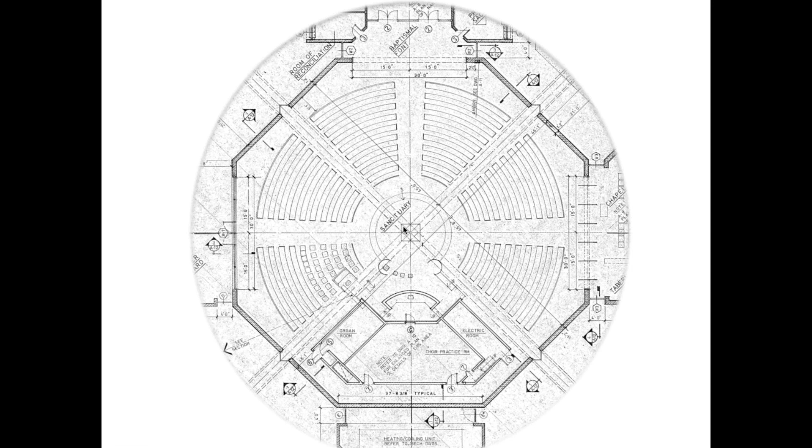In modern codes, the pews have to be farther apart, and we were also looking to increase capacity a little bit. But from this comparison you can see the new plan is pretty much like the original—seating the majority of people 270 degrees around the altar, with the altar still in the center.

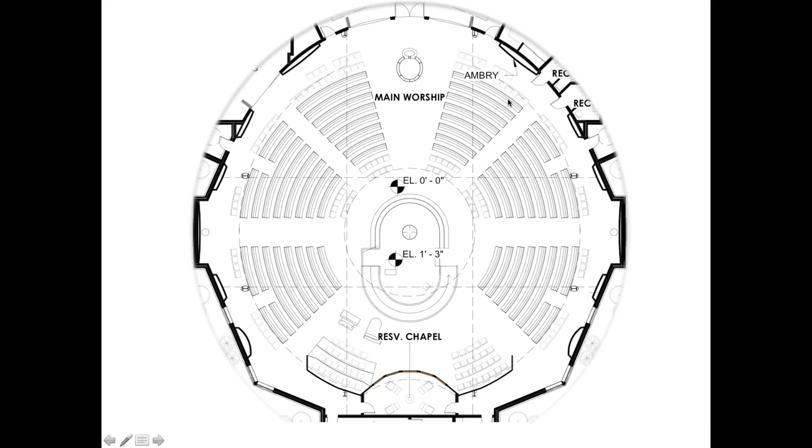Let's take a look at this. By the way, the distance now from the altar to the farthest seat is 50 feet, so it's not much more, considering we increased capacity by 23%.

Let's take a closer look at a cutaway view of the proposed worship space. A cutaway view is what you'd see if you sliced the church about 5 or 6 feet above the ground and looked down into it. The main entry is off to the lower left—that's where you'd come into the worship space. We'll look at the whole building in a minute.

The first thing you notice is that if you take the cross axes of the building, that's where the altar is located—in the exact center of the space, under a spire, for a very important theological reason. We felt it was very important to continue that in this new building.

The documents suggest that the font be aligned with the altar and be near the entrance. This is something you had in the previous church, but some complaints we got were that the font wasn't accessible, wasn't visible, and there wasn't enough space around it. So rather than having the font out in the gathering space or narthex, we've moved it well into the worship space, among the assembly, so that when baptism is celebrated, it's celebrated within the community and all can see it.

One way we allowed for that is by providing a very wide aisle around the font, giving lots of space for children and others to gather around it. It also provides nice wide aisles so that if you're bringing in a funeral with a casket and pallbearers, they can go by, or if a bride is coming down the aisle, there's plenty of room without stepping around the font. In fact, the other aisles are also pretty wide to allow for more gracious movement in the space.

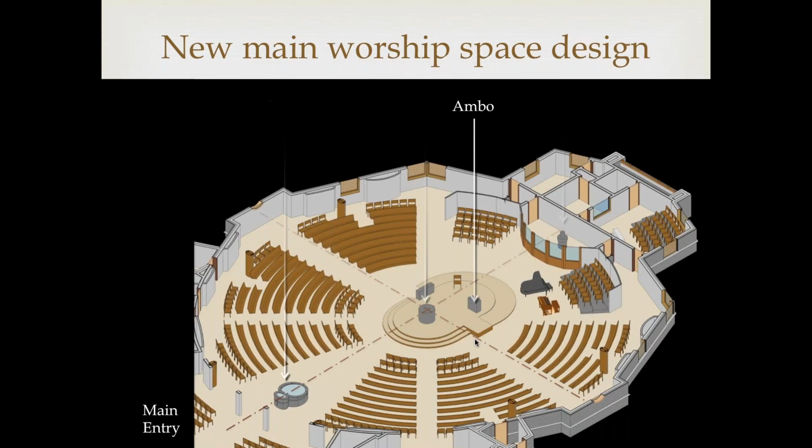This one is handicapped accessible by means of a curved walkway around the back. It's a very shallow slope, so it doesn't even qualify as a ramp, which is why there won't be handrails, but there will be curbs to keep people from falling off the edges of the platform or walkway. The ambo is set a little farther back from the center line on that platform so it can better engage with the people on the sides.

The music ministry is right behind that area, off to one side. So they are part of the assembly, which is really important, that the music ministry be in a location where they're both part of the assembly and where they can lead it. This is the perfect place for them.

This is all flexible seating on movable risers, so the music ministry can reconfigure it however it wants. There's also flexible seating on this side so that if you have more choir members, you can add here, or if you have special choirs for different times, there are all sorts of possibilities, because everything behind the altar platform is movable.

Speaking of seating, there are actually 3 types in the worship space. Most of it is fixed seating, pews, as before, but there's also some flexible seating in the music ministry areas on either side of the reservation chapel, and a couple of rows in front of the pews here. That's flexible seating, and we're talking church chairs, not folding chairs, very nice chairs that match the pews.

We provide that so that if, from a liturgical point of view, we needed more space in front of the altar platform for one thing or another, those chairs can be removed to give us more space. For instance, at a funeral you might want more space around the casket, so you might take out some chairs and leave others—all very flexible.

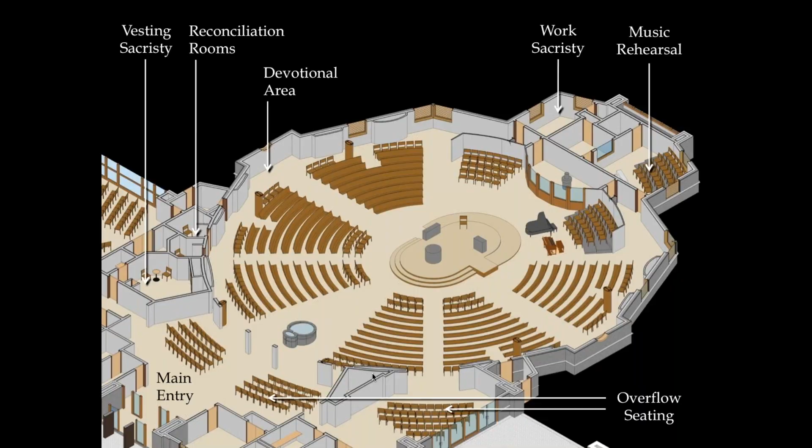Pulling back a little bit farther, you can see this gathering space. As you come into the church under the bell tower, which we'll talk about in a little bit, there's this big wide open space that has lots of room for lots of things. There's places to sit and rest, places to chat, places to set up tables for selling things. It's a very big, open, flexible space with a lot of natural light coming into it.

Between it and the worship space would normally be glass partitions or doors of some type. But when we need to use this space as overflow, those partitions would be able to be moved out of the way to really tie these two rooms together, so that the people sitting in this space would really feel part of the assembly. The other room over here on the right is the dining room, which has a similar capability.

This would be a solid wall that would also be opened up to allow people in this space to be able to be part of the worship. So with all the overflow seating, people are pretty much able to be part of the worship.

Those rooms also serve other functions, obviously. The dining room, our thought was, if you were going to do a repast after a funeral, this would be a great room because it's completely isolated. You wouldn't be disturbing anybody coming into the funeral if you're setting up ahead of time, and people could easily use this space for that. There's a kitchenette off of it.

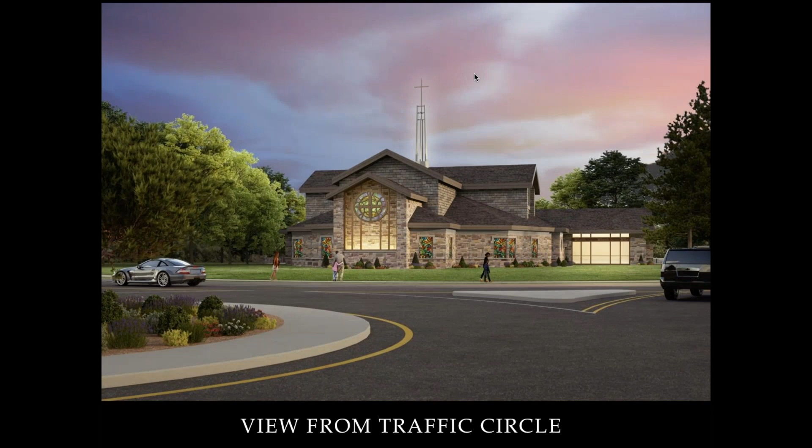A few things to note: we're about to walk you through three different photorealistic renderings. As you can see, it's really exciting to see what the look and feel and the architecture of the building is going to look like.

As Jim mentioned earlier, the materials and final colors have not been finalized. We are recommending a variety of stone, slate, roofing materials, and other colors. They're definitely, in our opinion, appropriate and very close to what I think is the right solution. However, in the next phase of design, we'll be getting into a greater level of detail and specificity on those material items.

So here we are - the first view, a very prominent view, standing at the intersection of High Mountain Road and Franklin Lake Road at the roundabout. I think this is a very popular view that most folks in the community would see on a daily basis. You can see a few very prominent features of the new building, starting at the top, a prominent steeple with a cross topping off the building, signifying that this is a place of worship.

You'll see how present this building is as it's located on the site. If you recall, the previous building was tucked behind many trees. It was very low-lying behind a few different landscaping berms. It was very difficult to see into the building, to see light, to see activity, and at times to even acknowledge if it's a church or not.

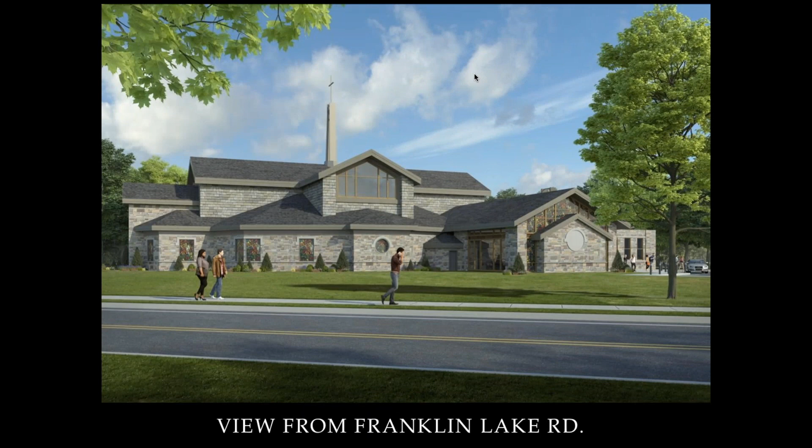This next view is taken along Franklin Lake Road. You'll notice how the building extends much longer in this direction, and it really gives you a great understanding of the architecture, the form, and the presence of this new structure. Again, that steeple adorning the top of the building is very prominent and highly visible.

Directly below the steeple, you'll see a very generous window. We call that a clerestory window, which will welcome an adequate amount of natural light into the worship space. We actually have three windows just like this on the east, west, and north to allow natural light to flood the worship space on a daily basis.

As you move down the building, you'll see along the base of the building the natural stone material, the stained glass windows. You'll notice some circular windows, decorative windows in areas of reflection. On the right side is where the daily chapel will occur.

You'll notice how that's reaching out and actually steps out of the footprint of the main building. This is one of those moments where we wanted the architecture to convey a sense of welcoming, a sense of outreach to the community. You'll notice some transparent glass and also stained glass in that daily chapel as well.

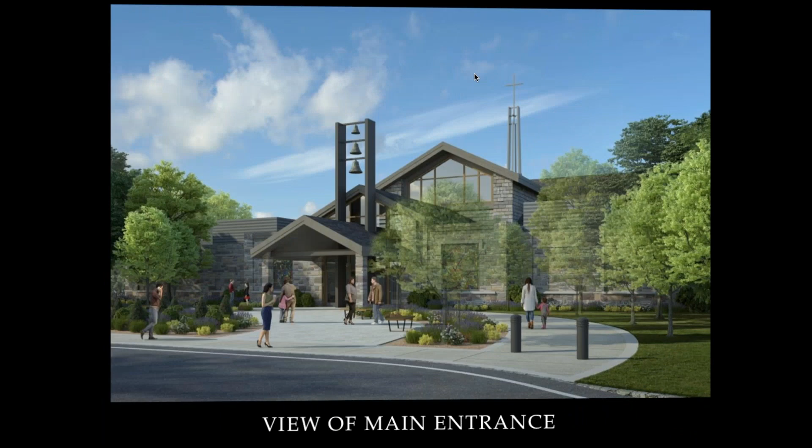And here's a very exciting view. As we look now from the parking lot, looking at the main entrance of the building, this is the view that every parishioner would experience as they approach the new building. There's a few very prominent features: the steeple high up in the background, and as you see the roof line step down to a more intimate pedestrian scale, you'll notice the new bell tower.

This was one of those hot topics that we explored many different options. We looked at preserving the original tower, we looked at reinventing a brand new tower, and we believe we landed on the perfect balance of preserving the old, salvaging the old bells, reintroducing them in a similar configuration, small, medium, and large, suspended in the same way that they previously were, in a new bell tower structure.

What's really exciting about this is not only the visual and audible connection every parishioner would have as they approach the building, but you also get to engage and walk under that bell tower at the front doors. So we feel like this was a very appropriate, respectful treatment of the past and marrying it to the future, a creative way of making this bell tower structure part of your experience on a daily basis.

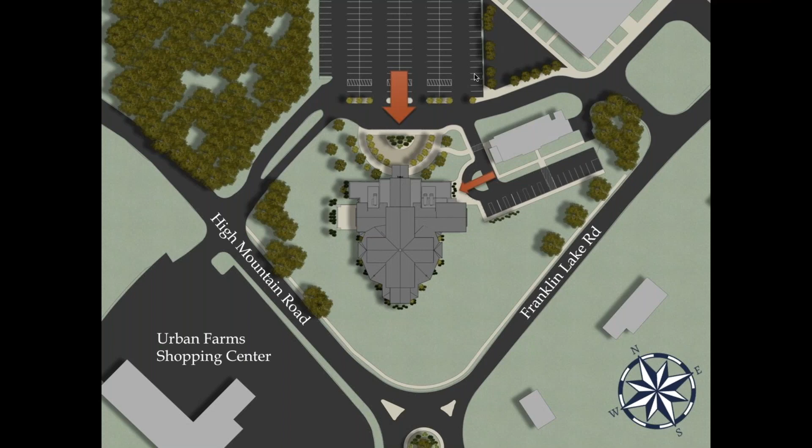So the site design was a hand-in-hand effort all along during the design process. As we developed the floor plans, we also looked at how the building wants to engage the site. We looked at the proximity to the roundabout, the proximity to the parish center, and we explored the drop-off points and how many entrances are appropriate from a security standpoint and also a convenience standpoint for Father John and other parishioners to have direct access from the parish center to the new building.

You'll see two red arrows, the larger red arrow on the northern side or top of the screen. That's your main entry point, where that last rendering perspective was developed. You'll see direct access from the parking lot through the plaza, up the curved path to the front door and under that bell tower.

On the right side, you'll see that smaller red arrow. That is what we're calling a secondary entrance or a drop-off point for the elderly or handicapped. That's also a good access point for folks coming to a daily chapel service.

We're also proposing new parking in front of the parish center. You'll see a number of handicap spaces and also other spaces located so that the front door of the parish center can formally now be used as the entrance.

If you go to the next slide, we also wanted to point out and share and graphically depict the footprint of the old building. This was the original church footprint. You can see the location to the parking lot and proximity to the parish center.

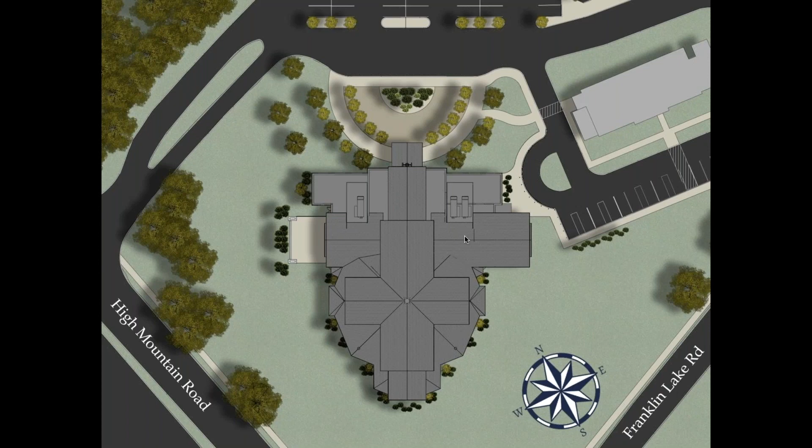Thanks, Matt. So now you've just seen our beautiful new design, and I guess you're asking a couple of questions. First might be, how much will it all cost and how are we going to fund this?

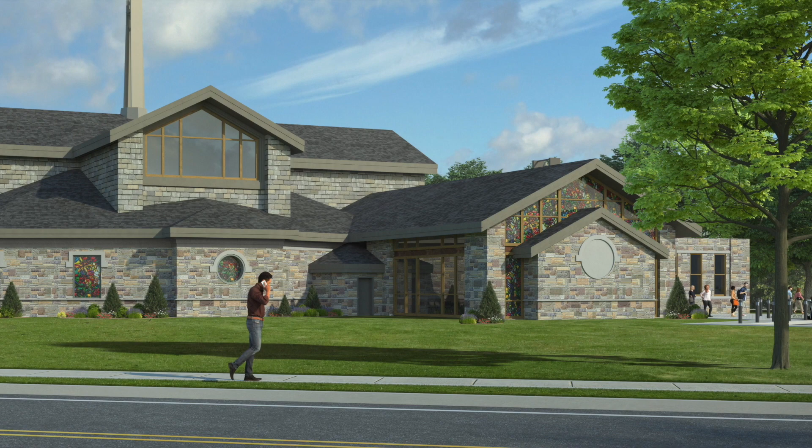First question: for the chapel windows, can we have stained glass windows instead of regular windows? As of right now, we have stained glass at the front of the room for the daily chapel. On the side window, we did envision some degree of transparency. We have not done the final design for that transparent window. I think there's a degree of some privacy, but also wanting to allow the community to see in is the design opportunity. We do see opportunities for incorporating more decorative glass there and also on the opposing wall near the drop-off.

Next question: how do the exterior materials of the church fit with the school and community center? Should any complementary work be done there? Why isn't the church exterior going to match the rectory and school brickwork? Who made this decision to have a clashing exterior? When we started to look at the material palette for the new building, we did take into consideration the brickwork of the existing parish center and adjacent buildings. The committee's view was that it did not need to be an identical match or even directly relative to the brick or style of the parish center. We really set out to design an appropriate new church, in appropriate style and material. The idea is that the stone would have some warmth and earth tones that would allow it to complement the existing parish center, so they would not clash in the end.

Next question, can you speak to the interior materials? As of right now, we are far enough along in the design process to have developed the materials you've seen tonight - the floor plan, site plan, and exterior of the building. We deliberately have not jumped into the interior design just yet. There was enough on the table and enough design to share with the entire parish tonight before we proceed to the next phase. So we do not have materials for the interior prepared yet, and that will be addressed once we are approved to advance to the next phase.

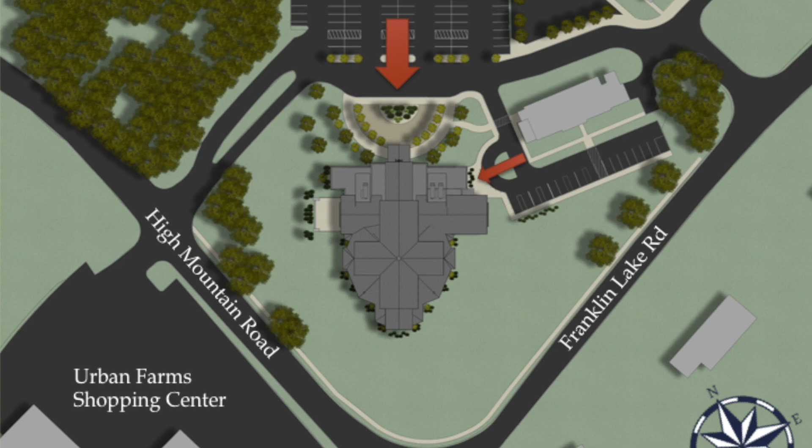Can the church be flipped so the front faces one or both of the main roads rather than the parking lot? The primary entrance faces the parking lot, and there was some discussion on orientation of the front door, which is really the back of the building as it faces the parking lot. A few considerations dictated the overall site strategy, having to do with proximity to the parking lot and travel distance from your car to the front door. There's a certain balance and distance we're trying to maintain. As you've seen in the drawings, there was a generous plaza which adds some distance from the drop-off lane, but we thought that was reasonable, dressed up with a variety of plantings, part of your transition from the everyday to the spiritual. So we felt the overall layout of the site was appropriate. If we were to move the front door to High Mountain Road, that would increase your travel distance even greater from the main parking. So that was really dictated by travel distance and proximity to the majority of parking.

This also speaks to the point that the front door is really the back of the building. That's why we deliberately created what we called community engagement walls, opportunities to bring light to the community, whether through a decorative stained glass window, a feature wall, or a degree of transparency into the daily chapel. Each of those moments creates a potential visual connection with the community and the parish.

Next question: will the bell tower be a working bell tower with the ability to ring the bells? We currently have the opportunity to create a working bell tower, though we haven't worked through all the details yet. There will likely be a movable clapper or some degree of movement to actually ring the bell, and then a series of speakers to amplify the sound. Those details aren't finalized, but there will be enhancements so the bells function to some degree and the sound is amplified.

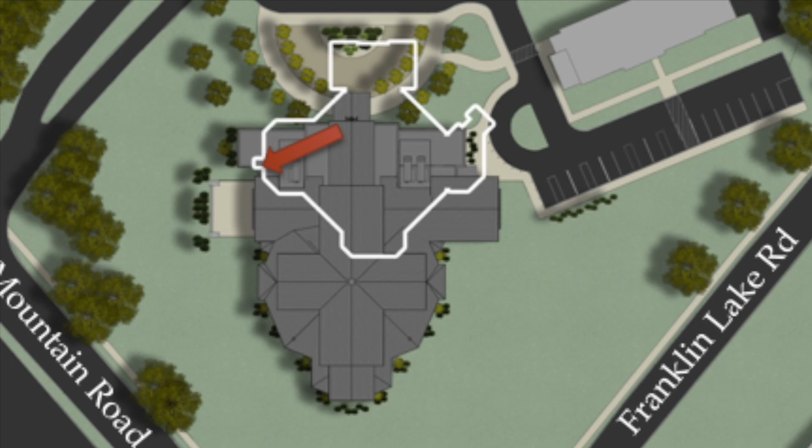Next question: the view from High Mountain Road and the existing floor plan do not match. There are no entry doors and patio, and there was no view from High Mountain Road shown. The first view, the first rendering, was standing in the roundabout at the intersection of Franklin Lake Road and High Mountain Road. We started at the intersection, then went right up Franklin Lake Road, and then behind the building to see the main entrance.

Next question: this church is huge, how much will maintenance cost? The building is larger than your existing, previous church — factor in the intended addition you were planning. The building is slightly larger than the original footprint plus the addition footprint, and the primary reasons were the additional programmatic spaces and the additional needs to support current and future ministries.

As far as maintenance goes, I think Father John may have mentioned that regarding giving and future operating expenses, there's a team that will be looking at that.

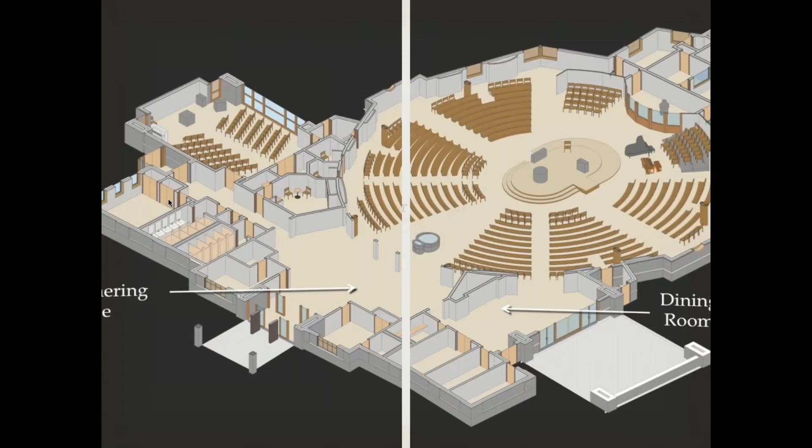Part of the planning effort to cut down on maintenance was creating a very efficient floor plan. As you can see in the design, there isn't an excessive amount of corridors meandering around the building — it's a very efficient layout. You walk into the entrance and narthex and gathering space, and have direct access to the dining area, the worship space, or the daily chapel. Part of an architect's and engineer's strategy to limit heating, cooling, and overall building size is to design an efficient, optimally planned building. We believe we've done that, scaling it down as much as possible while still meeting all the programmatic requirements.

I'd also like to mention that a 40-year-old building is always going to be more expensive to maintain than a new building. So there's an offset in that everything is new, and we've also designed with very low maintenance materials. This building should be better performing, better insulation, better windows, less heat gain.

It is going to be more of, and the energy codes are more stringent nowadays, so it will be a better performing building. Next question: the proposed church steeple appears too contemporary and Spartan. Is a more traditional design compatible with the body of the church possible? That's a good question.

So this is the concept design presentation, this is not the final. This is showing the intent and direction of the building. We can certainly take that into consideration as we develop further detailing of the steeple and the bell tower. Looking at that is certainly an option as we advance to the next phase.

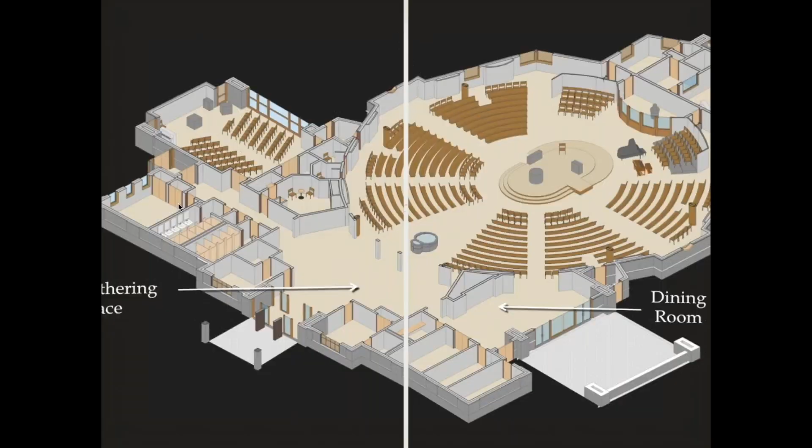Next question: are there any additional emergency exits? It's a balancing act with the building code and functionality. The building code does dictate your travel distance out of the building, out of the worship space, and out of any of the ancillary spaces. So we are right now meeting the code requirements.

There's also a matter of security and safety concerns. We don't want to have an excessive amount of access or entry points around the whole building. We talked about that as a team and came to an agreement with Father John on what seemed manageable from a security and facility management standpoint. So right now, we believe we have the appropriate amount of entrances and exits.

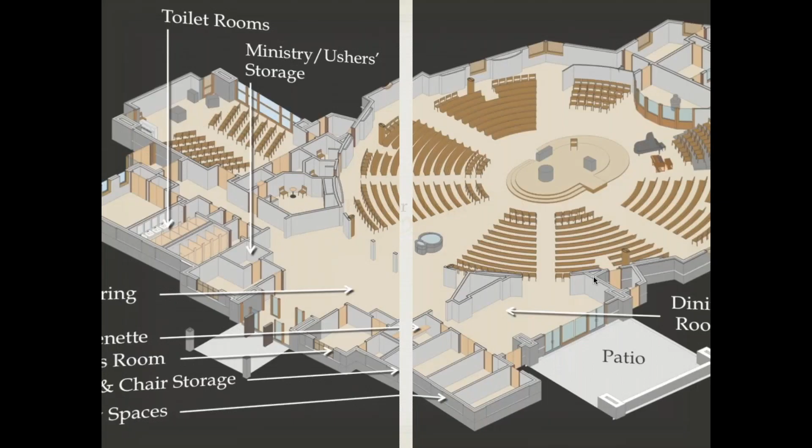Hi, the design looks great. I think the sidewalks are a great idea to invite the community and the parish to use the property better. Will these be included for the entire surrounding property as well as the main driveway off of High Mountain Road, where overflow parking generally has existed?

So I believe the answer is yes. I know Frank and the building committee has been very adamant about the desire for sidewalks around the perimeter of the property, around Franklin Lake and High Mountain Roads. Knowing that overflow parking has been off of High Mountain, we do want to welcome people onto the property as well. So I think it would be a nice feature to have sidewalks leading in off of High Mountain to the building along the existing driveway.

Next question, about the side/auxiliary parking and side entrance: respectfully, the rush to get a handicap parking spot can resemble a chariot race, think Spartacus on a Sunday morning. The side entrance only allows one way in and out in what seems like a small space. I worry that a handicapped person walking slowly could be at risk from energetic drivers competing for the last handicapped spot. Wonder if that auxiliary parking area could be one way, leaving from a different access point.

That's a good, thoughtful question, and you're right, there will be a demand for those spaces. We did look at creating a one-way entrance into that area and exiting to the far right of the parish center. The concern with that was this could become a pass-through, welcoming more people to cut through that area to exit the property after church.

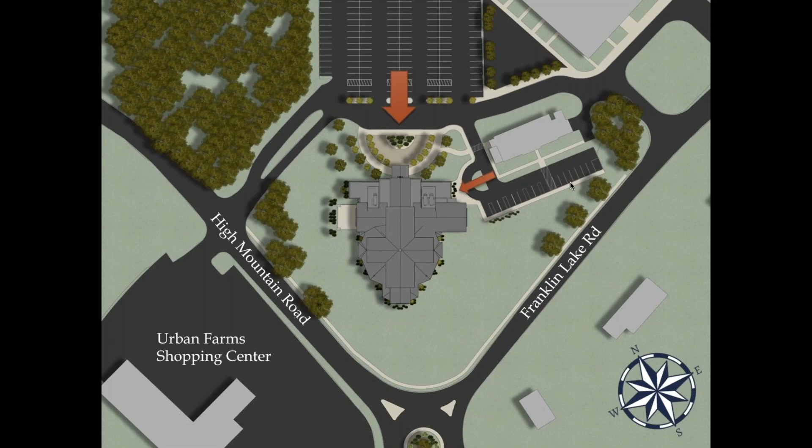We had a lot of questions about the size of the building and the amount of space for gathering and meetings and so on. I'll review this later, but the point was that these are all needs that the parish has. These are not just ideas that the committee or the architects came up with. Somebody asked what happened to the social spacing addition.

That is what we're actually providing in the space. Let me go backwards. The same amenities that were going to be in the addition have been incorporated into this space. So we have this area and this area to be used for social functions and so on.

Father explained the need for the Children's Liturgy of the Word and the chapel. These are all spaces that your parish has asked for and needs. Maybe you don't know that you need it, but these did not come out of thin air. If you go back and read the needs assessment report, you'll see that all of the things that are here are the same things that are in that report.

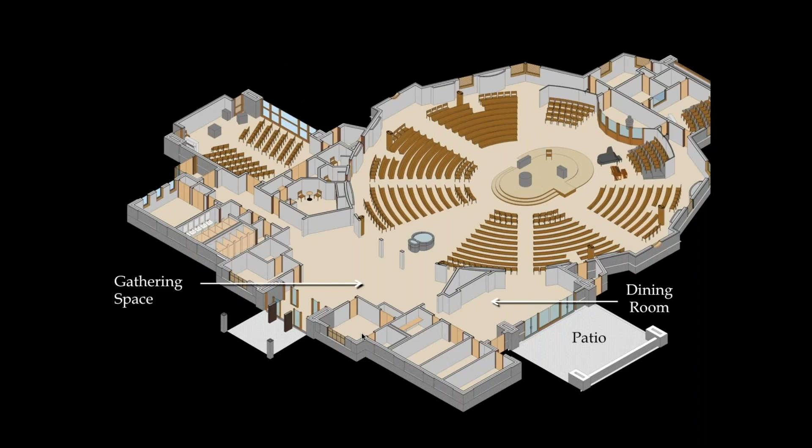There's also a specific question about the reservation chapel. I want to go back to that a little bit. Some people are concerned that it's not central in the church. Well, that's because the altar is the central focal point of the church, not the tabernacle. The liturgy is an action of the assembly, and the tabernacle is a place of reservation of the Blessed Sacrament. So the focus of the worship space should be the altar.

What we've done is create a way to see the reservation chapel, and although it may not be apparent from this view, we made sure that every seat in the worship space can see the tabernacle, with the exception of a few seats close to this wall on either side. Those seats would not be able to see it because there's a wall in the way. But everyone else can, which is what the documents require—that the Blessed Sacrament chapel, the tabernacle, be visible to all within the church. So some people ask, why is it partitioned off with glass?

That's really for two reasons. One, it allows for private prayer and meditation. So if you want to come into church before the worship service and spend some time in prayer in front of the Blessed Sacrament, we know that people talk and there's noise, and this private space gives you a place to do that.

Also, it allows us to reduce the focus further with lighting during the liturgy, because ideally there's nothing in the tabernacle during the liturgy, since the body and blood of Christ is being consecrated in front of us. So in theory we wouldn't even need the tabernacle in the room—it really doesn't belong as part of the active worship space. It belongs in a separate space. This way it's visible, it's accessible, it's ideal for private prayer, and it serves the purpose it was meant to serve.

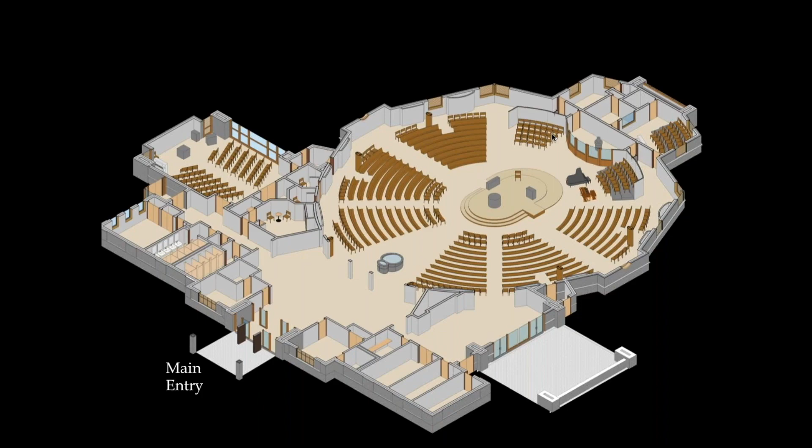I'm just trying to address a couple of questions. There were some about seating capacity, so we'll talk about that for a second. People were asking, some said attendance has been falling off in the last 10 to 15 years.

That's actually not true. We looked at the attendance records for the last 5 years, and they've been increasing every year. The numbers have been going up. So we didn't think it made sense to plan for fewer seats than we had before.

We got a lot of comments from people saying, I come here for Christmas Eve service and I can't even get in the building, let alone the worship space. The committee felt like if we're going to build a new church, we want to build one that people can get in and be part of the worship experience. That would happen not just at Christmas Eve, but every confirmation class and every first communion. You couldn't get everybody in the church. So the seating is based on that.

The question was asked, wouldn't it be cheaper with less seating? Obviously it would be, and if the funding isn't there, maybe that's something we'd have to look at. But right now, as Frank said, we've really tried to design the church that the parish has asked for, and that's what you're seeing today.

There were a couple of questions on the organ, about what we'd do if we didn't put the organ back, or whether we could save money by getting a refurbished organ. Let me answer the second question first. You can save some money with a refurbished organ, but it's a bit of a challenge because you have to get the right organ for the particular space. There are a lot of organs out there, but they are not free.

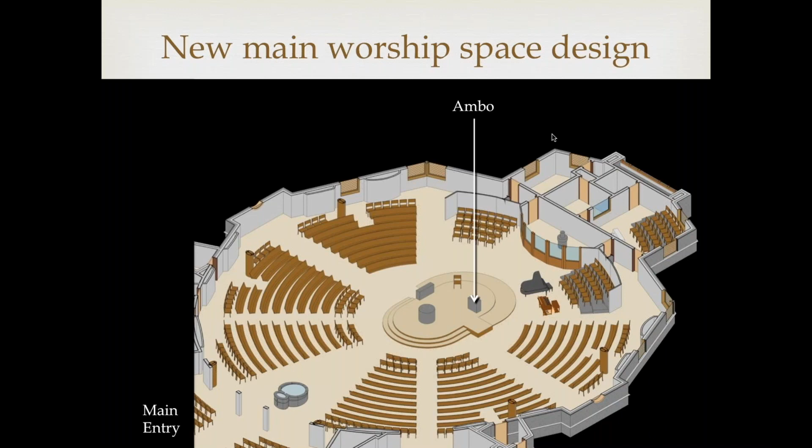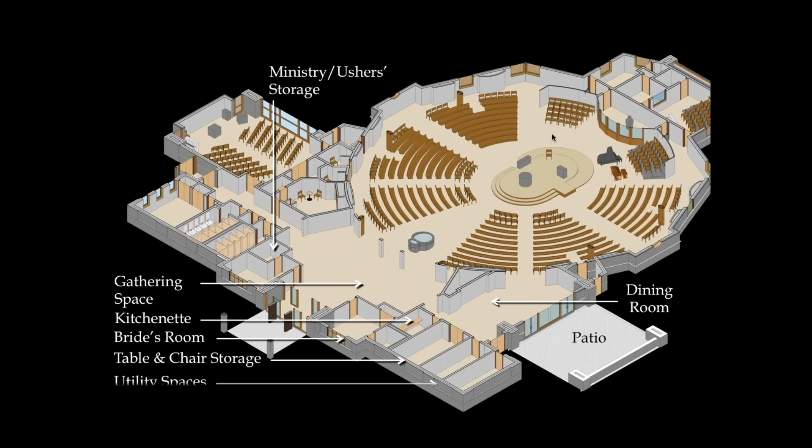So what I'd like to do is move forward - we're going to do the poll, but before we do that, I have to scroll through all these very quickly. I wanted to go back now and, thinking about the design you just saw, have you compare that to the needs assessment we started with.

One of the goals was to continue to foster a sense of community and welcoming by maintaining the original circular seating arrangement, and I think you can see from the plans that we pretty much maintained that as it was. To provide more natural light in the new church, I think the renderings show that we are providing two types of natural light.

We're providing it up high to flood the space with light, much in the way that the skylights did, but in a more even way. And we're providing stained glass windows at eye level. The reason those are stained glass is to block out views of the traffic, but we'll also let in light.

We have a very generous gathering space. It's large, about the same size, maybe a little bit larger than what was proposed for the addition. The design is definitely not modern.

There was another question about where— we don't have a cry room, but in the space outside the worship space, because that's an all glass partition, that's a space where people would go if they had children who were noisy and wanted to step out. The children's liturgy of the word space also will fulfill that role for families who have children who can be disturbing and want a place to go where they can still be connected to the liturgy without being in the same room.

And of course, we have much more accommodation for the disabled. We have spaces for them to sit and places for them to park. We explained how the tabernacle works, and we talked about the bells.